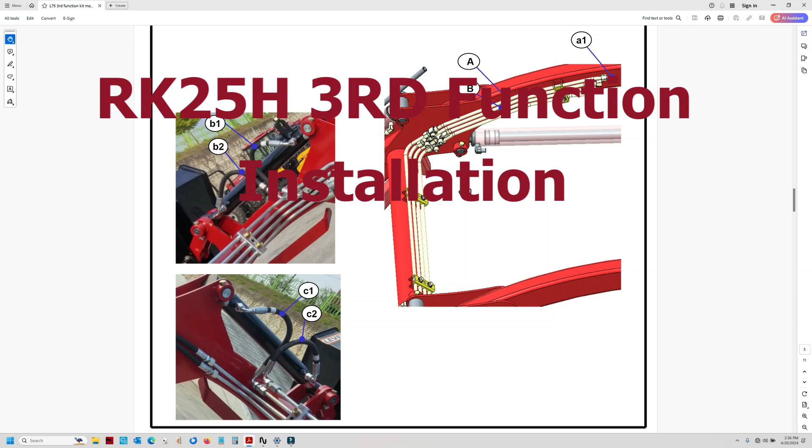RK does a really nice job with their depiction of the existing lines, as you can see here, marked A and B and A1. These hard lines will be removed, as well as their connected lines running down the front of the loader. Here on the left-hand side where you see B1 and B2, these are the bucket cylinders, and this is the left-hand bucket cylinder.

You will be replacing these two lines. They will be disconnected from the cylinder and the current hydraulic piping. Down here is the right-hand bucket cylinder, and the only thing you'll be doing here is just taking off these two V-nuts on the hydraulic piping.

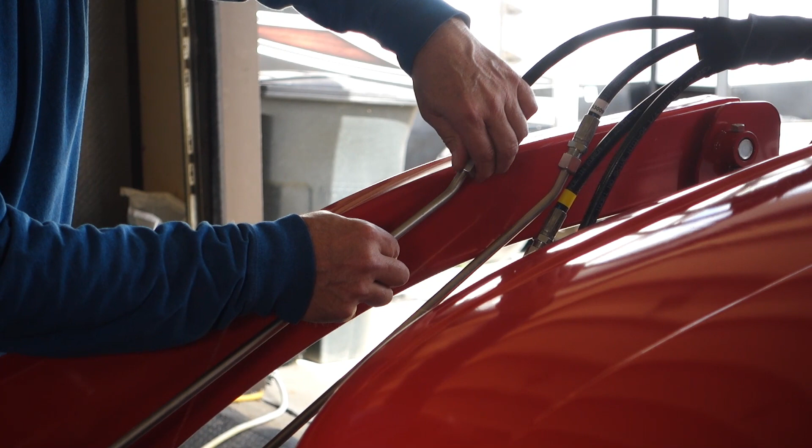Here is now where we loosely install the provided second piping bracket after we attach the loader actuator lines to the main proportioning valve.

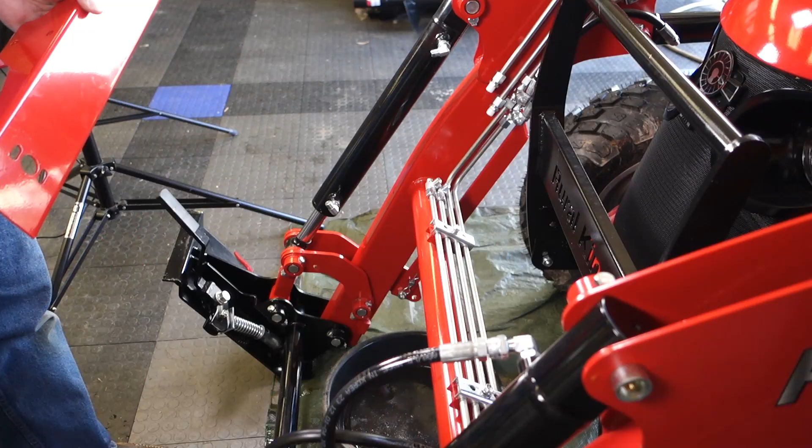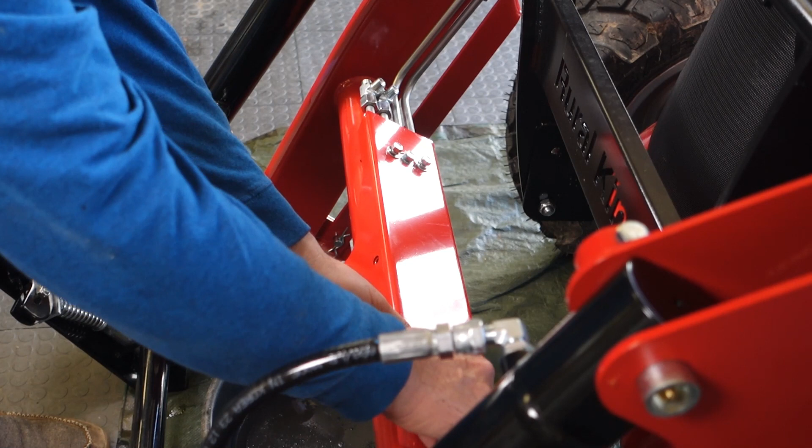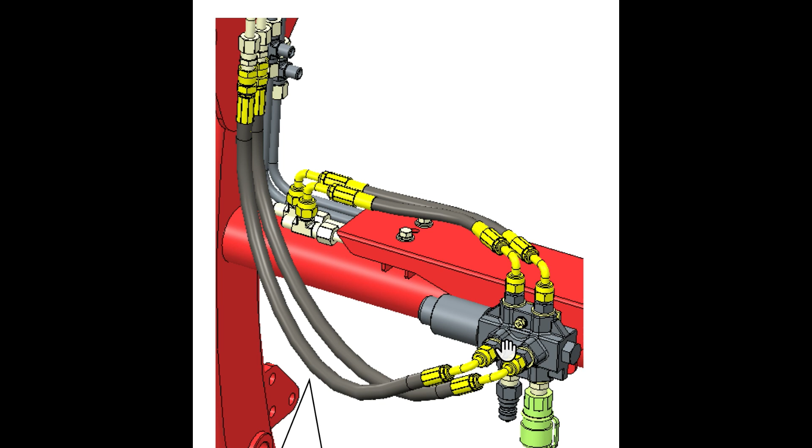Next, we're going to install the lines in the kit that attach to the hard piping that goes to the loader valve, and we'll go to the diverter valve. All lines at this point should just be loosely tightened. Don't tighten anything at this juncture until the loader valve is installed and you have all your final connections.

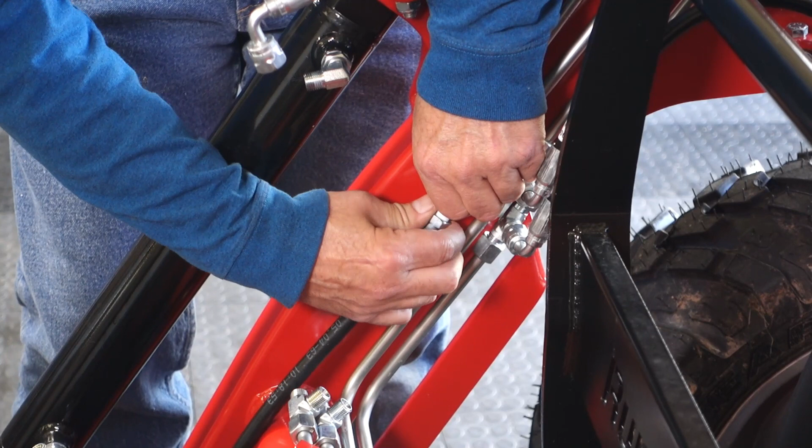Next, we're going to install the provided lines from the left-hand cylinder to the T's on the hydraulic piping. Just keep all connections loose until all the plumbing has been installed.

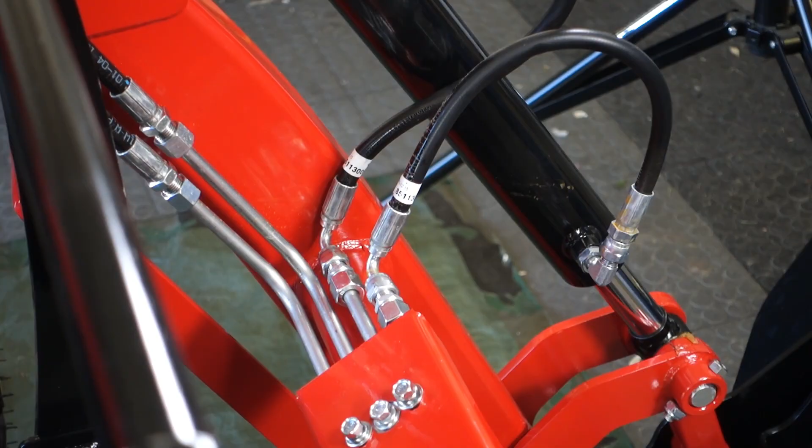Let's discuss briefly the diverter valve. The valve itself is included in your kit with 6 bonded seal washers. It's important when you actually attach the fittings that you do not crush the washers when you tighten them.

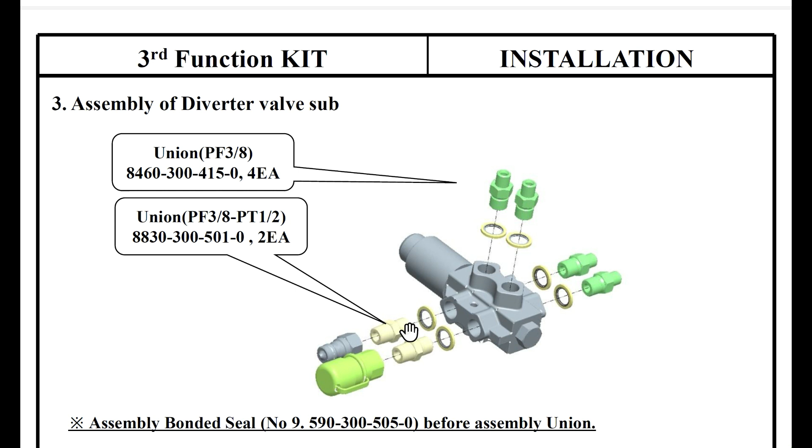You also have 4 unions, and you have 2 unions for your quick connect adapters. These are indeed different thread. Be careful where you put them. They are clearly identified in your kit.

After assembling your diverter valve, you are going to put it on your cover plate right here on the cross arm of your loader. There is a little plate in your kit along with these screws that attach the valve assembly to the plate and to the cover plate or the protective plate for your piping.

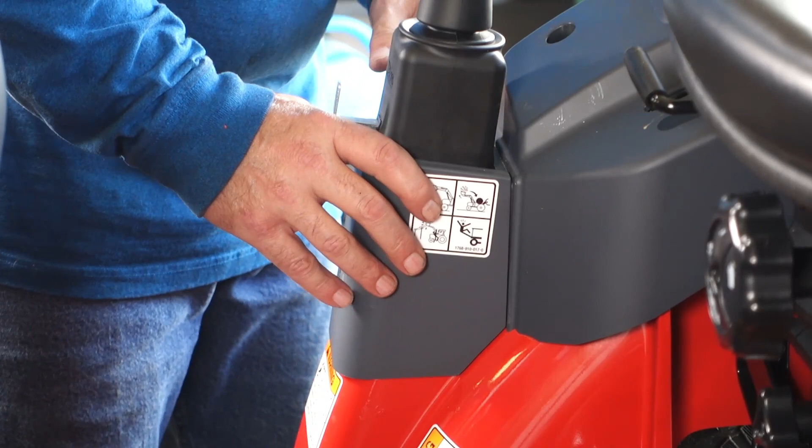This is relatively simple. You've got a red lead that goes to battery plus, a black lead that goes to battery minus. You have a fuse.

You have a relay that's attached to the tractor, which controls your diverter valve. And you have a pigtail harness for the joystick lever switch we previously installed, and you're going to connect the two wires from the joystick switch to the chassis harness.

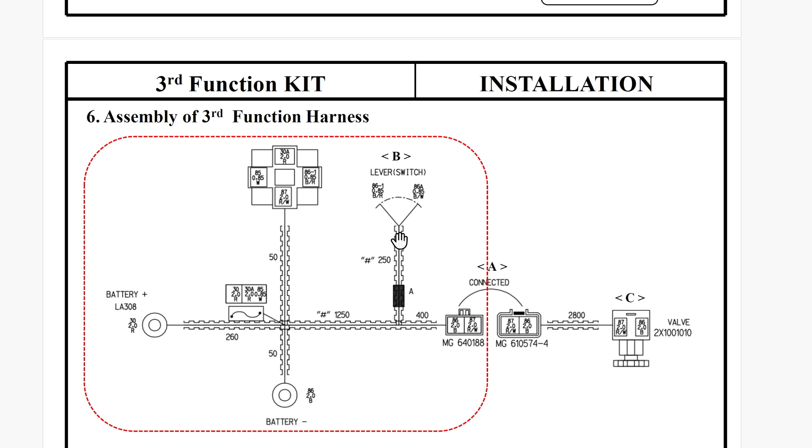Here is the basic routing diagram from RK for the chassis harness. This portion of the harness shows you the connection of the plus battery, the negative battery lead, the relay location in general terms, and the routing of the chassis harness towards the back of the tractor.

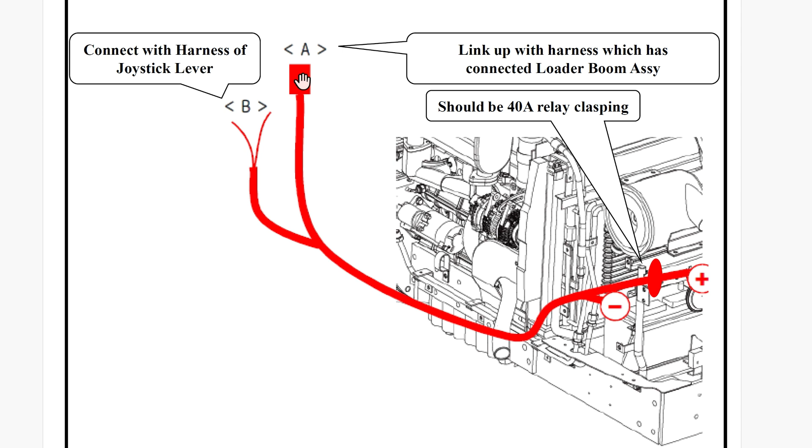This is the two leads that connect to your joystick, and this is the portion of the harness with the connector that connects up to the loader boom assembly. It's very important that this portion of the harness does not interfere with boom operation, and we'll discuss a little bit of that later on.